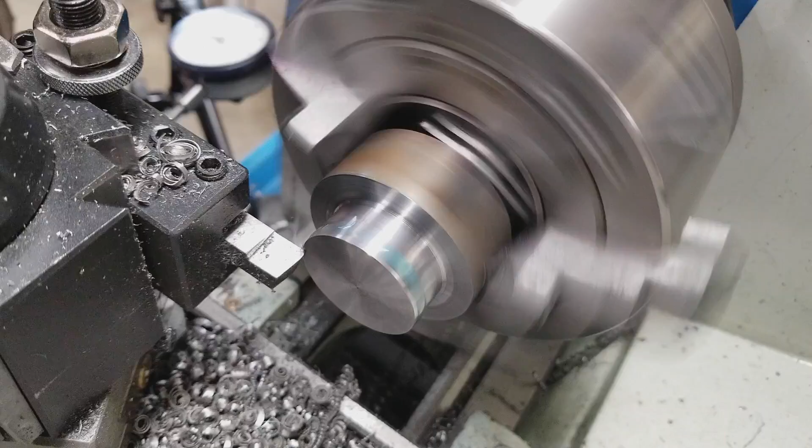Why is that wanting to chatter? Got like no stick out here. It's not a heavy cut. What the heck is going on?

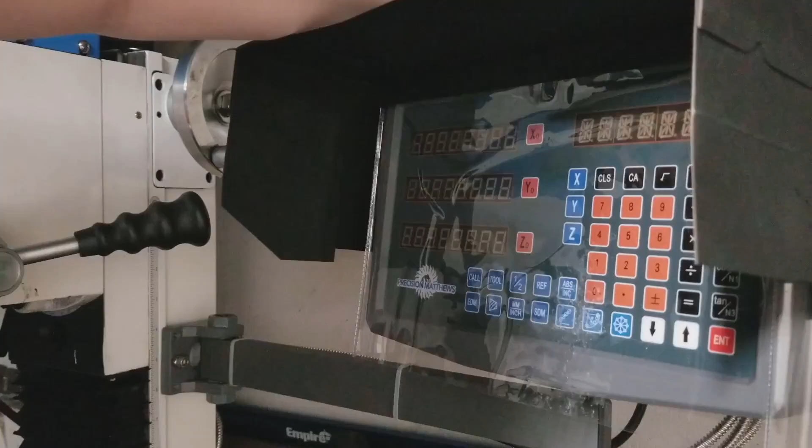We're back on the PM1 steam engine today and we need to do an operation that you don't see very often. It's called spot facing. There's a lot of different ways to do it. We're going to pick the best one for us right now.

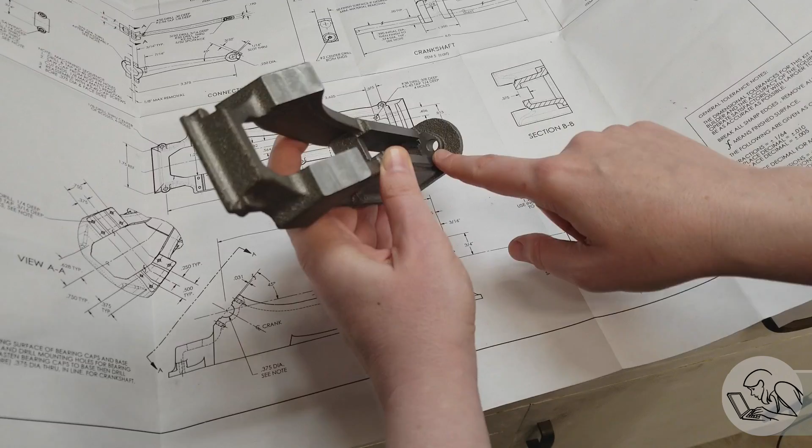Strategy time again. So we've got the hole made for the piston rod and next we need to machine this end here. And the drawing calls for that to be round so it'll mate with the cylinder. And that's what it's supposed to look like right there. This is a spot facing operation, which is a fancy name for a very shallow counterbore.

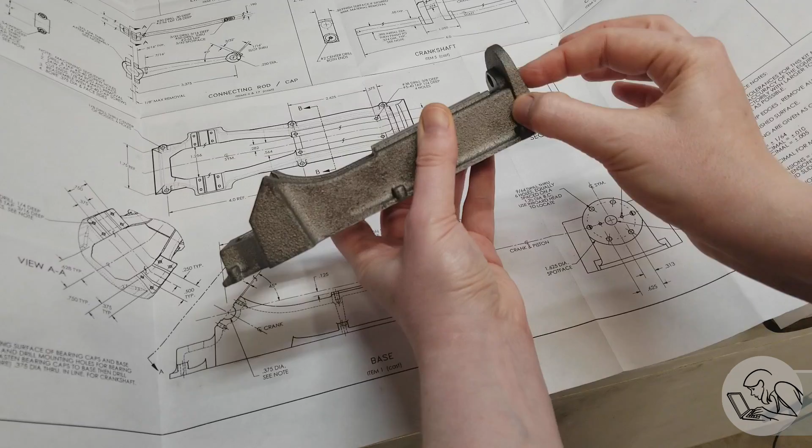So we've got a slightly tapered surface here. It's tapered, of course, because of the draft of the casting. And so we need to make it flat and it needs to have a round bottom. The diameter of this is 1 5/8, 1.625 inches, which is not a super convenient diameter. That doesn't match like an end mill or something that I have.

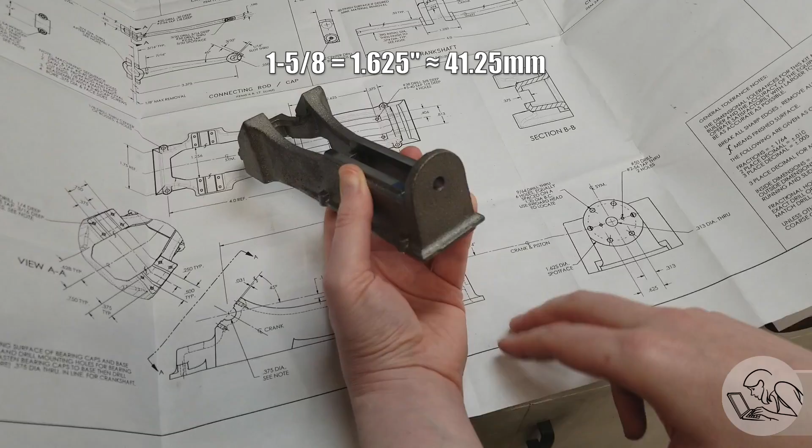And we could just machine this flat and it would be fine, but I want to make it nice. I want to make it round like it's supposed to be. So I have a couple of ideas for that. First idea I had was to do it as a genuine spot facing operation. So I would fixture the casting on the cross slide, something like that.

And then I would make a tool that would look a lot like a line boring tool. It would be a shaft that would go in the chuck and in the tailstock, and it would have a small piece of tool bit like this, and it would spin like so. And the idea is you make a shaft that fits through the hole there, and then it has a particular grind on the tool bit, look a little bit like a lawnmower blade,

and you spin this guy and you face off the surface. So you make this tool bit grind such that it grinds a surface of the exact diameter that you want in one pass. That's how real spot-facing machines work.

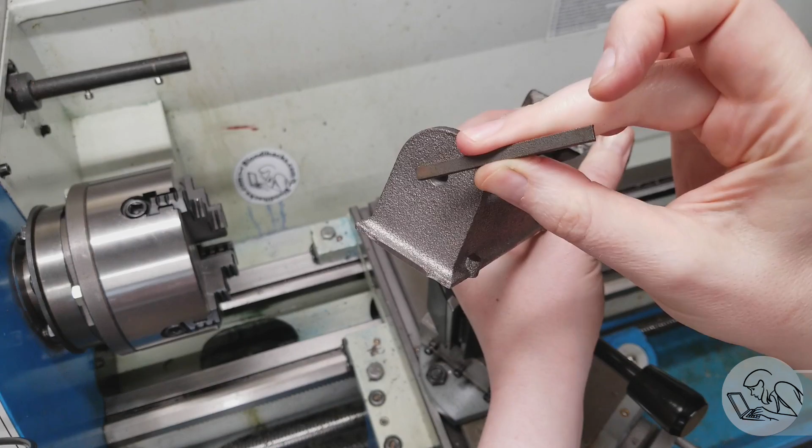Here's the problem with that plan. This hole here is not very big, and the tool bit I would have to make is also not very big, and the distance that the line boring rod would have to go through is quite long. So the rigidity of this whole setup would be pretty poor. And I really rather doubt I'm going to be able to do a 1.625 spot face with such a small shaft over such a long distance.

It's really tempting to try that because it would be a cool operation on the lathe, but I really don't think it's going to work. I spent a long time thinking about this, trying to come up with some way to make it work. Like, was there a way I could do it in multiple passes, extending the tool bit a little bit each time, or design some kind of a spot-facing tool that had an adjustable depth of cut? I really wanted to make this work because it would have been a really cool operation. But I had to give in, and I'm going to do it a simpler and more practical way.

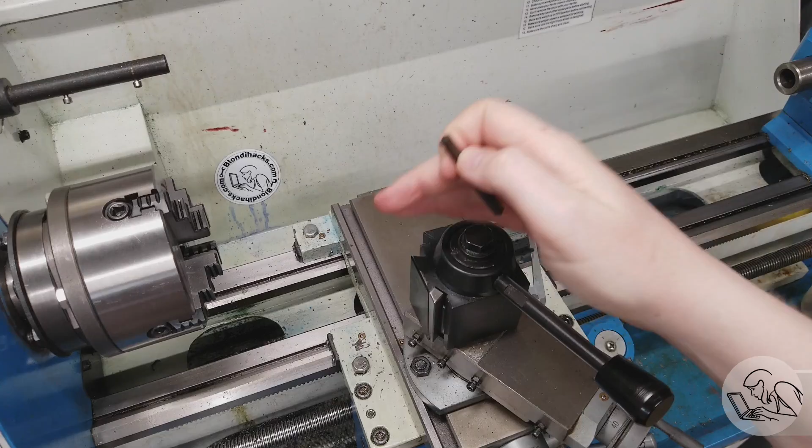Instead, what I'm going to do is I'm going to stand it up in the mill, like so, and I've got a piece of steel here, and I got my tool bit, and I'm going to make a one-time use fly cutter, and it's going to be exactly the diameter that I need. So I'm going to make a little miniature fly cutter that has the tool bit at exactly the 1.625 diameter that I need,

and then I'm going to take advantage of the fact that the spot face has an open end on it. It's not completely embedded in some other surface. So what that means is I can take my fly cutter and I can come in from the side like this, and I can just come in to the same mark on the DRO each time, doing multiple passes, working my way down, and my stopping point is centered on my hole right there. And if I locate that hole really well and I'm careful with the DRO on each pass, then I'll end up with a perfectly centered spot face of the correct diameter.

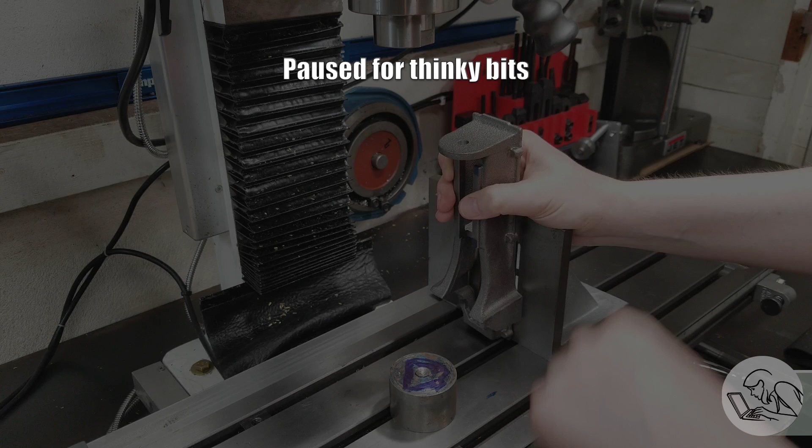Now you could also do this with a boring head. Boring heads can be used as a variable diameter fly cutter with the right tool grind. However, boring heads take up a lot of vertical space, and this is a very small hobby mill. So with the tall casting in there, I really only have a couple of inches within which to create some sort of tool that can do this job. So that's why I'm going with the little tiny fly cutter.

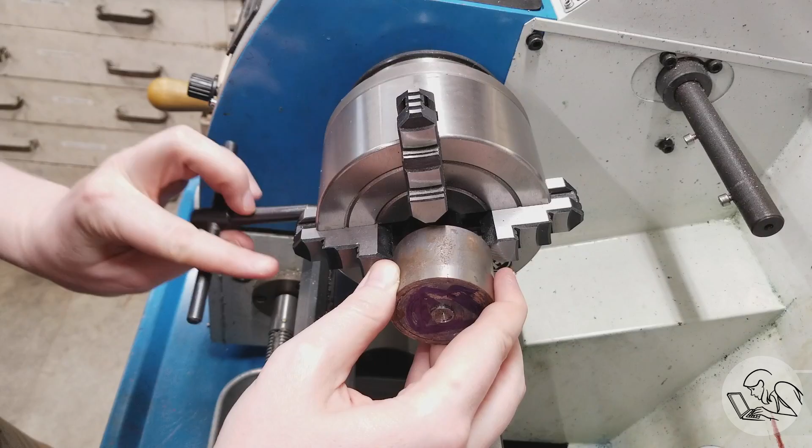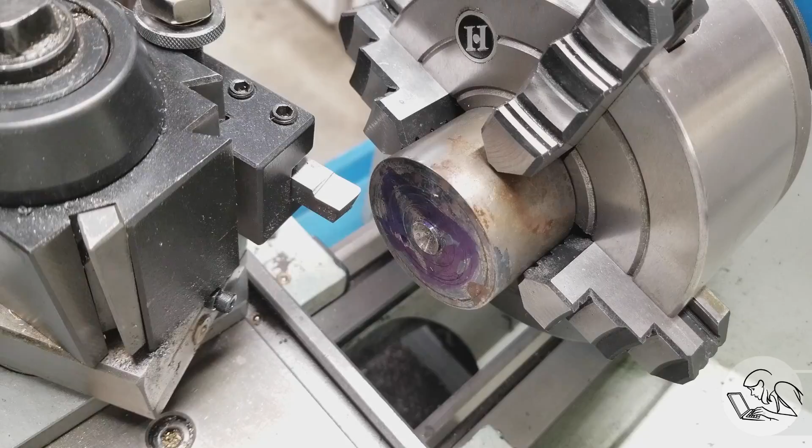I'll start by chucking up this piece of scrap in the 4-jaw, and I'm doing it in the 4-jaw because there will be 2 separate setups required here, and well, also just because the 4-jaw happened to be on the lathe and I don't want to swap the chucks twice, even though these first few steps would be a lot easier on the 3-jaw. But I will start by facing the end, as is tradition.

Times like this, I'm glad I sprung for the power cross feed. Look, Mom, no hands. This last part should be especially satisfying as I face off that old drill cone from some previous part that was made from this stock.

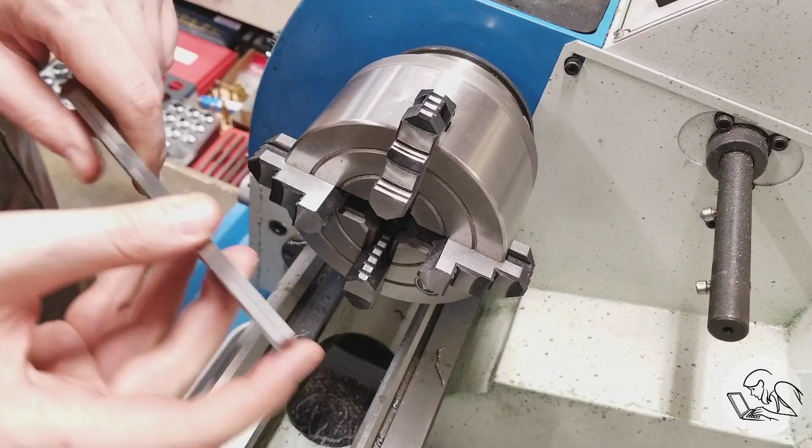Now I'm going to flip the part around, and I want to make the other side parallel to what we just faced, but I need it to be off the surface of the chuck a little bit. So I've got some parallels in there to give it some space. This would be a great use case for a lathe spider if you've ever seen one of those, but I don't have one. So the parallels work just fine. You can tap them in securely against those, and the part will be parallel to the chuck face. Just of course don't leave the parallels in there, that would be very bad.

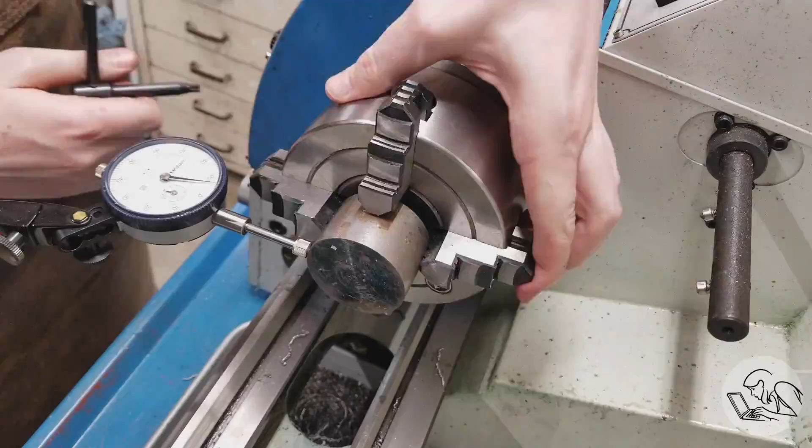The reason I need it off of the chuck face a little bit is because I don't have enough length of material there to create the features that I need if the part is seated fully against the chuck face. There's a little bit of an art to this tapping in method, because if you tap it in too firmly, the parallels get jammed in there and you can't get them out. So you kind of have to tap it in so that it's about the same friction as a feeler gauge, so you can still remove it, but you can trust that it's fairly parallel. This isn't going to be 100% perfect, but it's certainly good enough for what we're doing here. So now I can face off the other side, and those two sides will be parallel.

Now I'm going to square up the tool post here, and I'm going to make the mandrel of the fly cutter. I touched off with a witness mark there on the depth that I want, which isn't critical as long as I have a good chunk there that the collet can grab. You can see there why I really needed those parallels in there to space it off the chuck, because I really don't have enough room on this piece of scrap to get all the way in there.

Now this is cutting very well, but you can hear there's a kind of a noise in the cut that's right on the edge of chatter, like it lives next door to chatter, and you know, they've talked over the fence a little bit, and maybe it's kind of interested in chatter and it's thinking about buying chatter dinner, but it doesn't know how chatter would feel about that, but it's not quite there. And this took me a little while to figure out what was going on. I messed with my setup a little bit and I fooled around with it, but it was doing the job, so I just kind of kept rolling with it.

Here on the finishing pass though, you can see what's wrong and where the chatter is coming from. The grind on this tool isn't quite right. You can see that when I put the nose radius on it, I messed up the front clearance a little bit. So when the tool is squared to the work like this, you can see that it's actually cutting a little behind the nose radius on the flat section there. So I basically accidentally created a shear tool. So it's getting a great surface finish, but it can't handle very much depth of cut at all, or it wants to chatter.

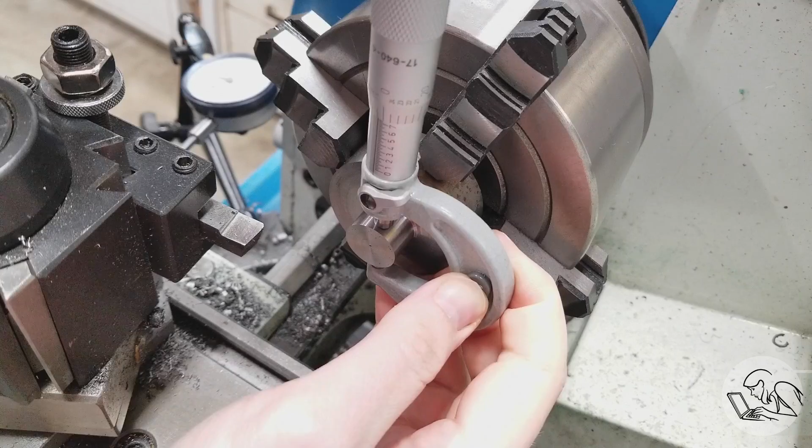Okay, let's see how I did. I'm aiming for 750, so it'll go in a 3/4 collet. And I'm about a thou over, but it'll still fit in the collet, so that is okay. So I will chamfer that edge and just make sure that it's going to go in a collet, and indeed it will. I think that's going to work out just fine.

Now I'm going to flip this part around and do the other side of the fly cutter, but once again I can't push it up against the jaws because I need to be able to get right up there with the cutter. But now I can't get parallels back there, so how do I make sure the part's running true with the lathe and the front face of it is square?

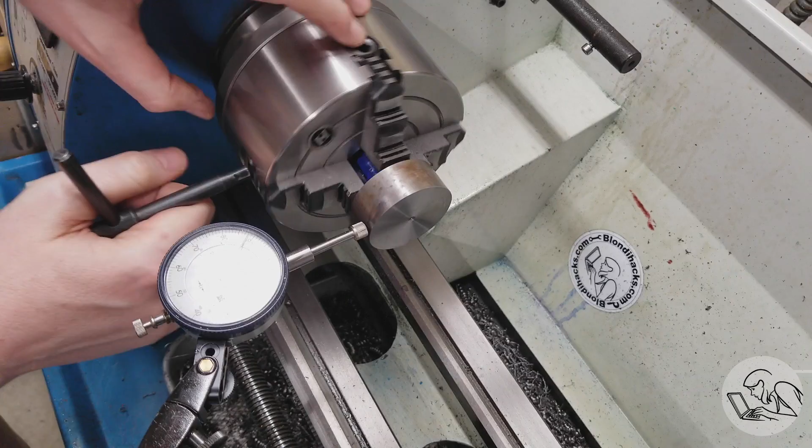I start by dialing it in just like you would with any other part in the four-jaw, and then I move the indicator over to the front face and I dial that guy in as well. So the front face should be reading no runout if it's square to the lathe, and I have a couple of thousandths there, so I just tap it in, and I'm tapping on the sides.

That's a little bit counterintuitive because you would think you would want to hit it on the face because you're trying to square the face, but if you do that, you're just going to push it further into the chuck and it's not going to straighten the part.

Now I can do a couple of passes on the outside diameter just to get that running true. You can see I've switched out the tool there, as I said, and this one is cutting much better. You can see that it's cutting on the nose radius instead of behind it. And then a little chamfer there will finish it up.

Now, did I do this in the minimum possible number of setups on the lathe? Probably not. I swapped it back and forth twice end for end, which was probably a waste of time. I'm sure if I'd planned this a little better, I could have done it more efficiently, but the job got done. Now I'm just going to deburr that backside there with a file because I forgot to do it when I had it in the other setup. You really want to avoid improvising in machining. It really pays to plan ahead a bit.

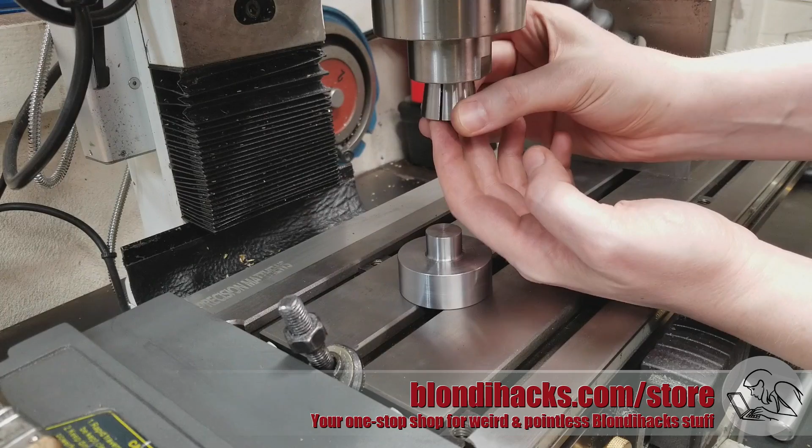Now I need to make a hole for the tool bit a very precise distance from the center in order to make sure that it cuts the radius that I want. So I need to get it perfectly aligned on the mill spindle, which, because it's designed to go in a collet, is actually very easy to do.

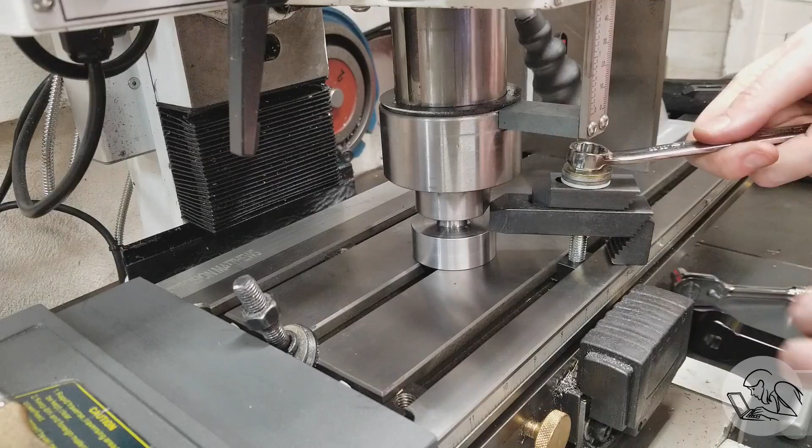I just put the fly cutter body in the collet, pull the quill all the way down till it's on the table, clamp it down, and then zero the DRO right there, and then loosen off the drawbar, which I did by tapping the drawbar wrench to make sure that the drawbar loosened before the part twisted on the bed there. I'm kind of shocking the drawbar loose before it tries to turn the part. And then I pull the quill up, and there's our part, perfectly centered on the spindle.

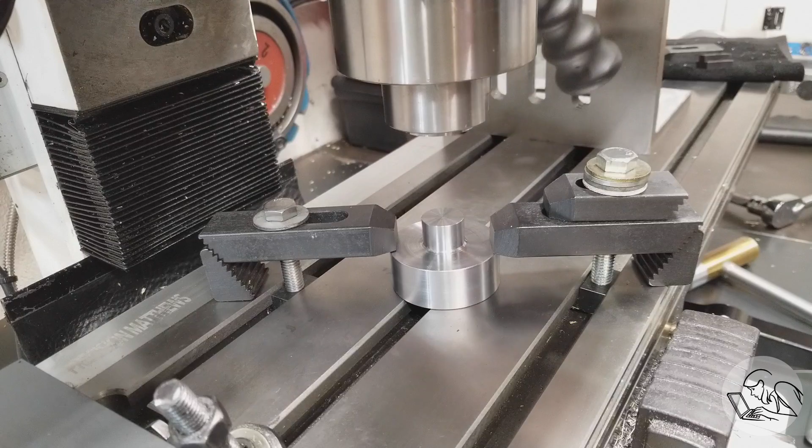Now we need to get with the mathy math because I need to figure out where to put the hole for that tool bit. And the trick is that the outer front corner of the square tool bit has to be on exactly a 1.625 diameter so that it will cut our feature properly.

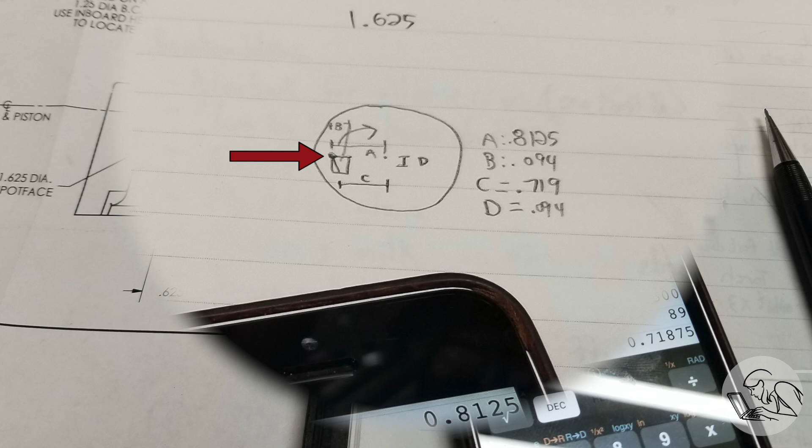That means that the hole that I'm going to drill with a round drill bit, mind you, inside that square has to be at a specific radius, but also a little bit below center line because the front edge of the square tool bit has to be on center. So here's the math that I did to work that out. And luckily, because we're centered on the spindle, the DRO is going to get us to that spot quite easily.

Next, I want to double check that my drill is going to go into the T-slot of the mill table here and not hit the mill table as I hoped it would, and indeed it does. I got a little lucky there on that positioning and didn't have to redo that. I start by center drilling that, and I'm drilling to a little less than the size of a circle that would fit inside that square for the tool bit that we need.

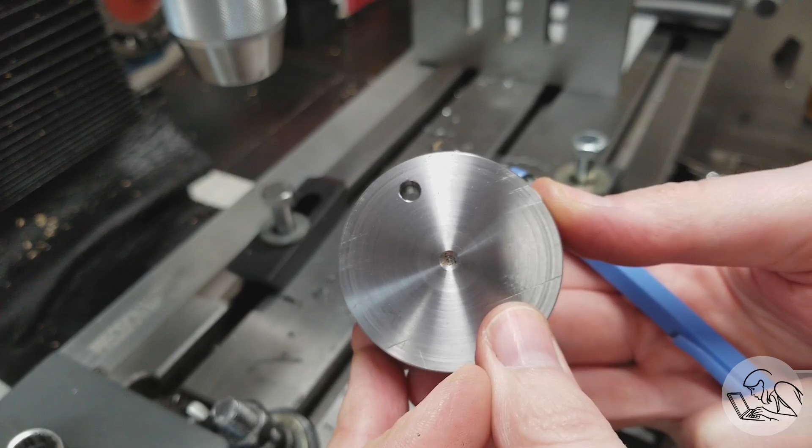That's really it for the machine tool work on this thing, believe it or not. So I'm just going to deburr that hole. Okay, that's looking very nice indeed. I think we're done. We'll do a little test fit with the tool bit here, and oh, right, something square peg round hole. Okay, we need to make this into a square hole.

The perfect tool for this job would be a square broach that I could use in my arbor press. Unfortunately, broaches are very expensive and I don't have any. So I'm going to do it old school. Here's a file, and this file is smaller than the square hole I need to make. So here we go. I'm just going to file that round hole square. And yes, this takes a while, and yes, your hands are going to be a little sore by the end of it, but it's character building.

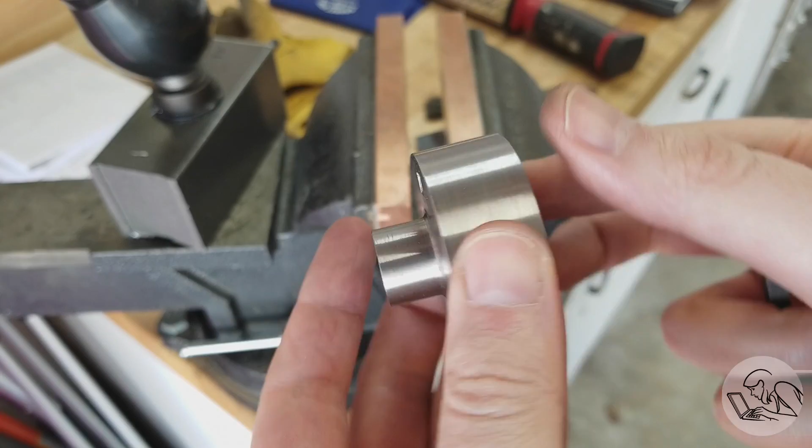The key here is to check your work often as you file to make sure you're not getting crooked and that you're not introducing taper. And that's really easy to do when filing because the file can easily bend or shift off of flat as you go. But after about an hour of character building, we have a pretty decent looking square hole that I believe my tool bit should fit into. And look at that. Very nice. I think that might just work.

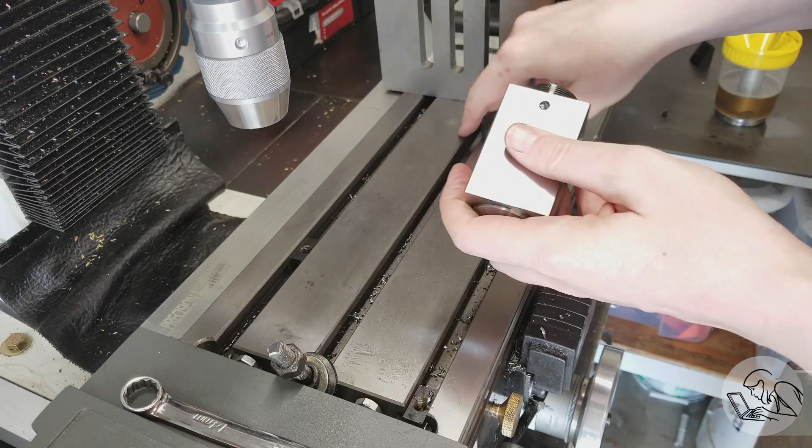Okay, I lied when I said we were done with the machine tools because now we need to put a set screw in there to hold that tool bit in place. So I'm going to mount the body of the fly cutter in a 5C collet block here, and I'll put that on a 1-2-3 block to get it up off the table since the vise is over on the bench because it was in the way of our steam engine project. And I'm just squaring this up by eye and by feel. It really isn't that important.

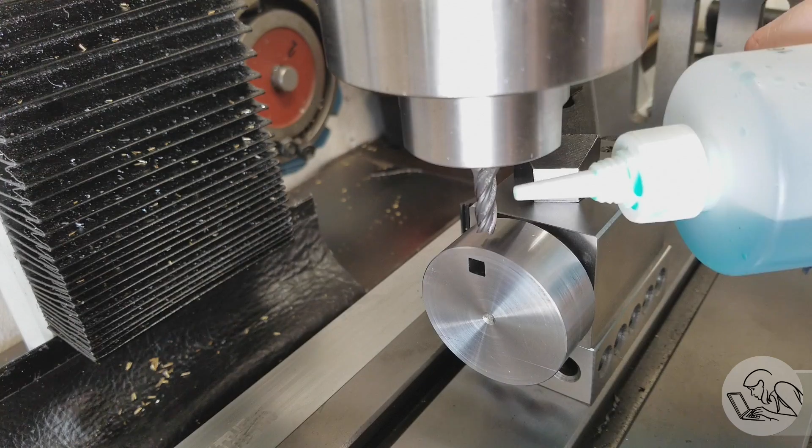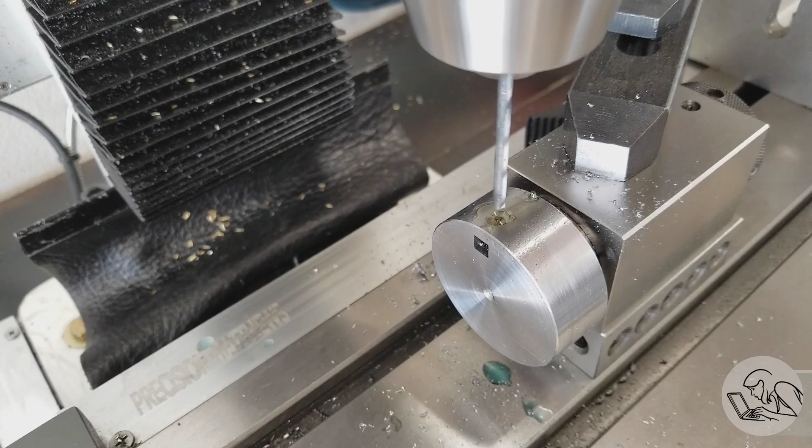And I'm going to put a flat spot on here with an end mill because normally when you drill into the top of a convex surface, you can just center drill carefully and that will put a dimple in there that'll keep the drill bit from wandering off the curved surface. However, when you're drilling offset on a curved surface like this, not on the dead center of it, even a center drill is going to want to wander off that surface. So make a little flat spot with an end mill first, and then center drill on the flat spot, and then come in with the tapping size.

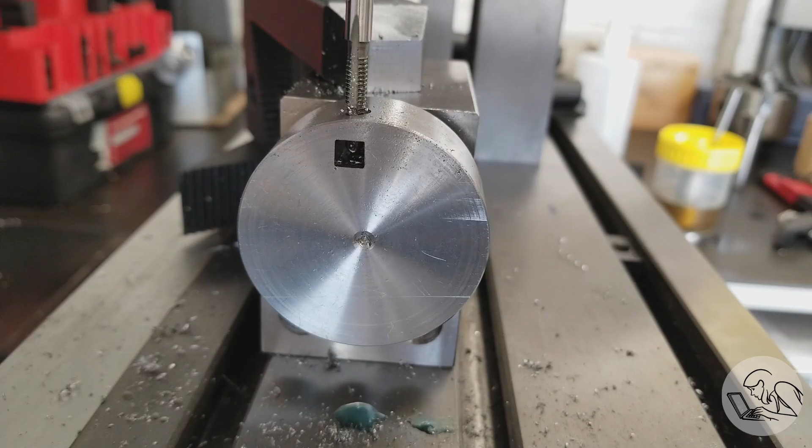Then I can come in with my spring-loaded tap follower and set up to tap that hole. This is, I think it's 8-32. I don't know, it's whatever set screw I found in the bin. And I just eyeballed the location of this threaded hole to make it roughly centered on the square hole there. As long as it's in the square hole and touching the tool bit, it's going to work. So we'll do a little test fit here now.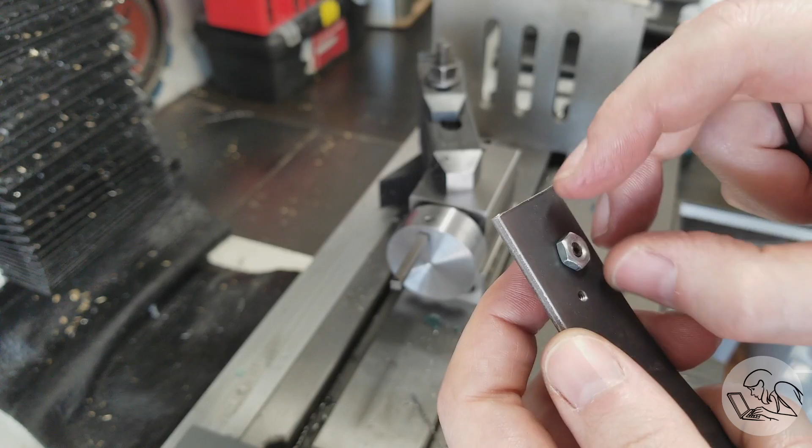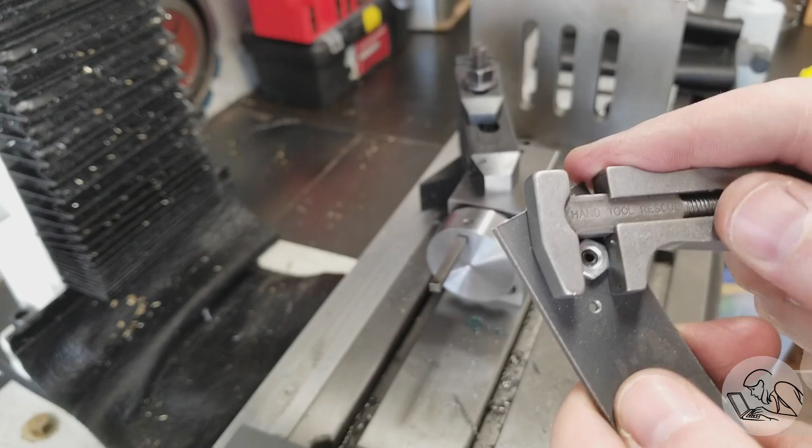Tool bit goes in. Set screw goes in, and it's going to work, except my set screw is too long and it has a dog point on it, and both of those things mean there isn't a lot of thread engagement. So I thread it into a piece of scrap, put a jam nut on the back, and grind it flat on the grinder. And now I have an itty-bitty set screw. Now undo my jam nut there, and thread that guy in there. And that looks like it might work. So you can see how it's going to spin around and be a fly cutter.

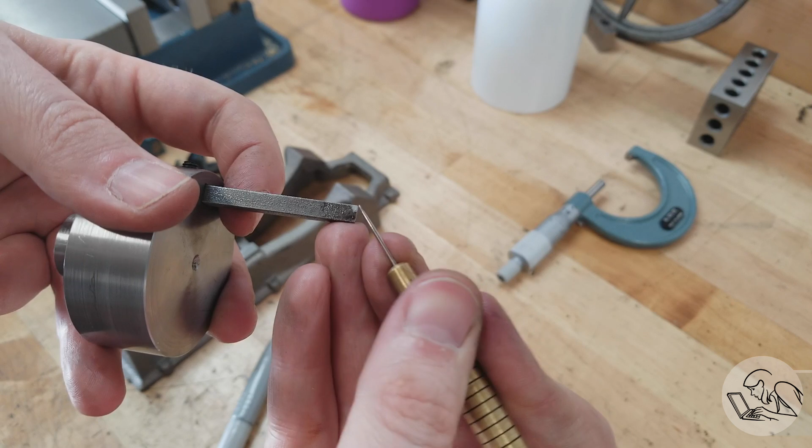Now it's time to grind that tool bit. Obviously it's a lot too long and it has no grind on it. This is a raw piece of high-speed steel that actually a viewer donated to the channel. So I mark the cutting point so that I don't lose track of it, and I just need to grind clearances falling away from that cutting point in every dimension.

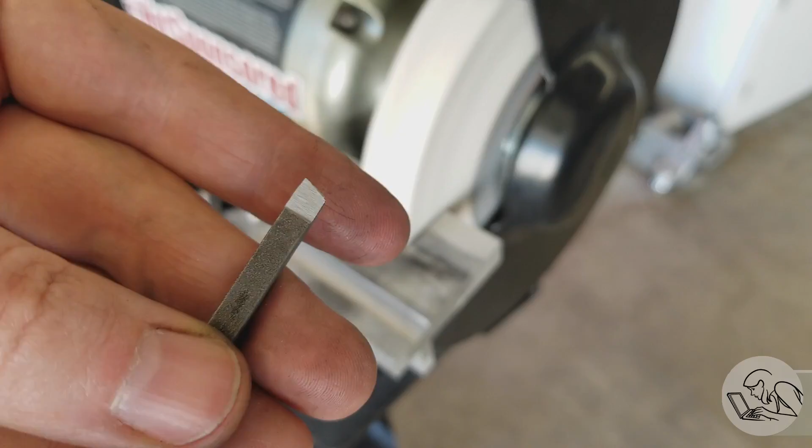What's interesting is that this ends up being standard right-hand turning tool geometry because the tool bit is vertical. Normally with fly cutters, the tool bit is lying sideways, and so you end up requiring left-hand turning tool geometry, which is sort of annoying because it means you can't reuse your tool bits between your lathe and your fly cutters. But in this case, we can. It's a very tiny tool bit, which made grinding a bit of a challenge, but it looks like that is going to work out.

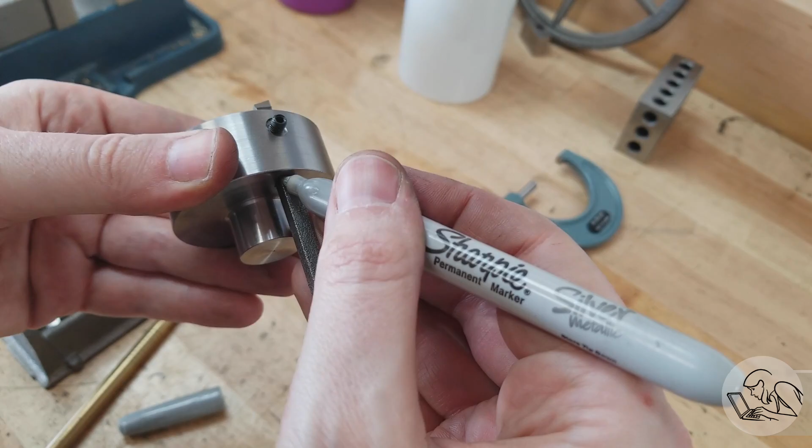And I'm just going to mark the length now and cut it to length with a grinding disc on the Dremel.

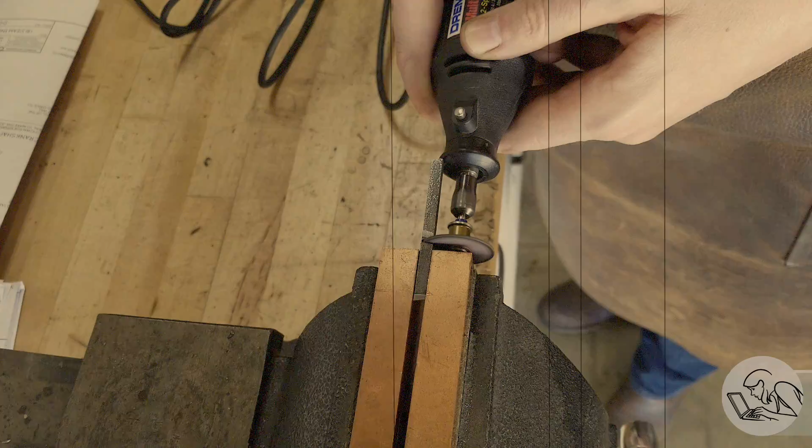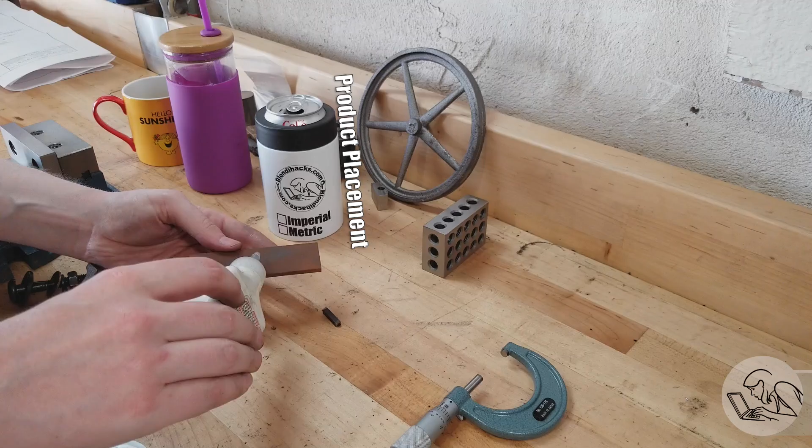Here's a pro tip when using a Dremel like this. Make sure to finish the cut such that the extra piece that is being cut off lands perfectly on the bench. Now this takes practice, but if you're really skilled with this tool, you can get it to do that every time. What? Why is everybody laughing? What? I could make it do that again. And I don't need to show you, I don't have anything to prove. Get out of here, this is my shop. Now, where was I?

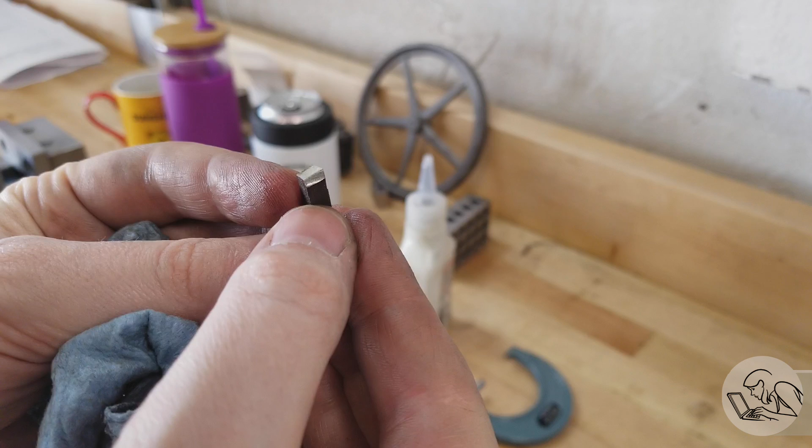Oh yes, this tool bit. So next I gave it a little hone on the stone and sharpened it up. It's looking pretty decent. You'll see that I didn't grind the side clearance there all the way down, mostly because I was lazy, but that's okay. This cut is not very deep, so that will suffice. Back into the fly cutter it goes, and the fly cutter goes into the mill, and let's see about giving this thing a little test drive.

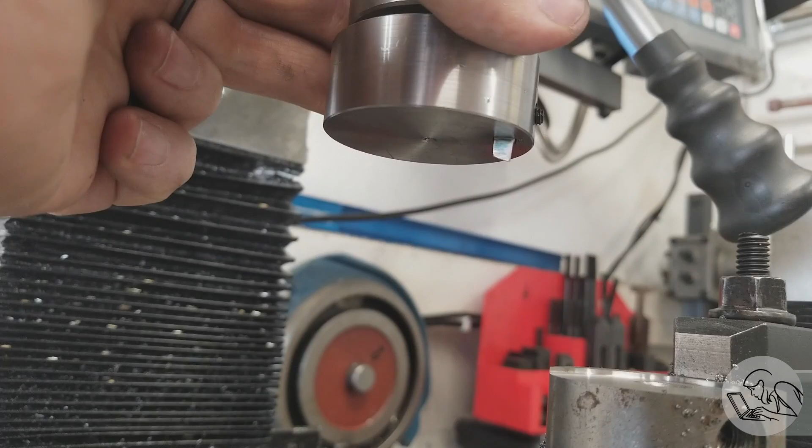So I think that's gonna work. You can see how the outside point there is gonna be doing the cutting. So here's a piece of scrap, and I'm gonna do some test cuts here. The piece of scrap has kind of a boss there that's proud of the top surface, which will work out good because it'll give me a chance to test it out.

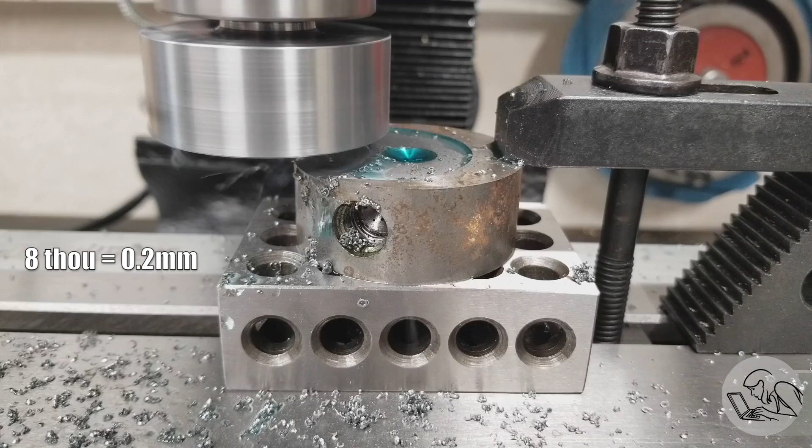So far so good. It's cutting like a fly cutter, which means it threatens to chatter if you get too aggressive with depth of cut, and you need to feed very slowly. I think the most I did was like an 8 thou pass here. It's important that my test cut is deep enough that I have enough meat to measure the straight sides of the cut and not catch the fillet made by the nose radius of the tool. And this is cold rolled mild steel that I'm cutting with it.

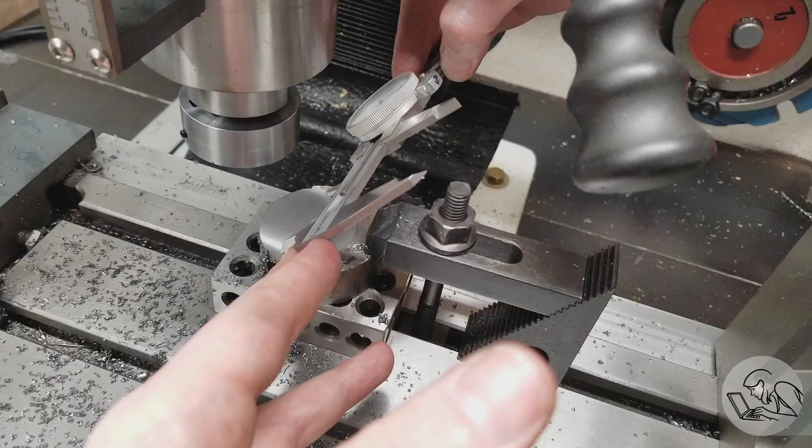Surface finish there is pretty decent. I think it could be a little better. I'll experiment with that. I made one more pass with a little bit more speed and just a 2 thou depth of cut, and now the surface finish is excellent. But let's see how we did dimensionally. I'm measuring at the widest part there where the cut is straight and trying to get a sense of it. And you can see that we are at 1.646.

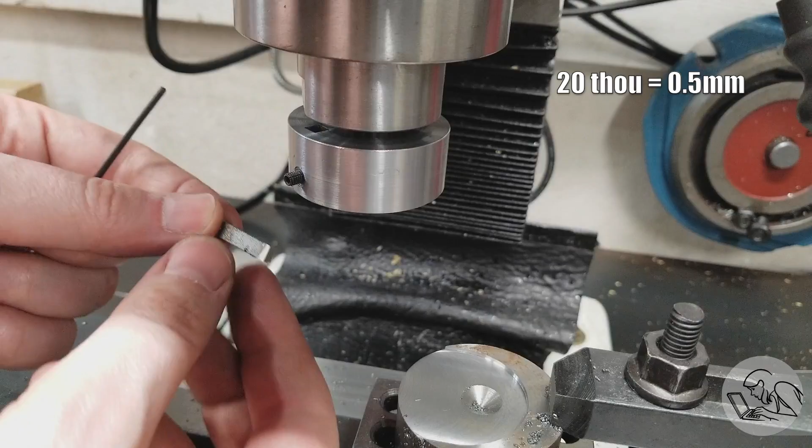So we're actually 20 thou over on the cut, so probably my filing was a little bit imprecise, but that's actually good news for us because I can make the diameter of the cut smaller just by grinding the outside of that tool bit down a little bit. So I blued it up and marked a 20 thou line on the edge and then ground that side back down to that line. So another test cut.

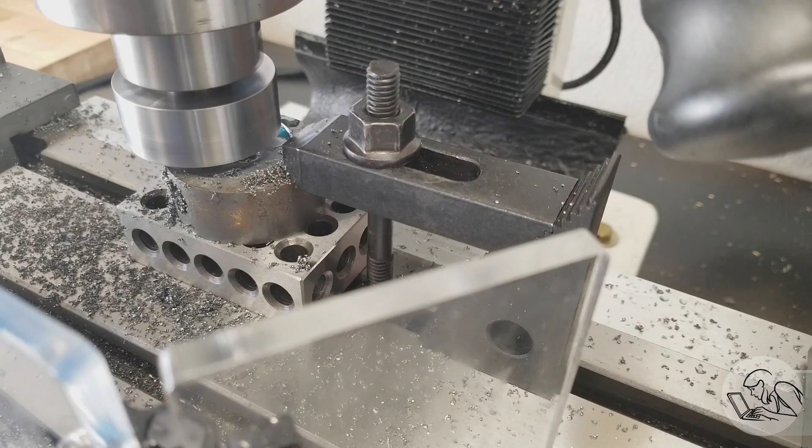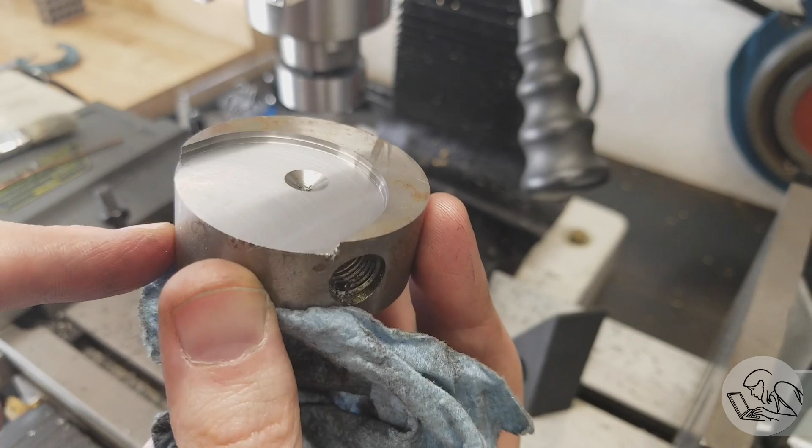And let's see how we did this time. Again, making sure I went deep enough for this measurement. And we are at 1.621. So we're actually 5 thou under now, and I think that's going to be okay. Here you can see the two test cuts, one of them being 20 thou smaller than the first one. That worked really well.

Now, if I wanted to chase that last 5 thousandths, there's a couple of things I could do. I could, of course, regrind the tool and make a new cutting edge on it that was 5 thou wider. A better way, perhaps, would be to grind down two sides of the shank of the tool to make it a little smaller than the square hole. And that would allow me to shim it with some 1 thou shims, 2 thou shims on either side and move the tool radially and change the diameter of the cut.

But I'm not going to do any of that. I actually like that it's cutting a little undersized right now because this is the shape of the cut that we're going for on the final casting. It's coming in from one side and leaving a curved arc here on one edge.

So what that will allow me to do is if I need to make it a little bit larger, if that 5 thou is a problem, then I can just move my cutter up and down 2.5 thou and widen this cut out a little bit. And I'll just end up with a slightly oblong curve out here that honestly you probably won't even notice, and it's going to be behind the cylinder anyway. So I'm really happy with how this tool worked. Let's try it on the real thing.

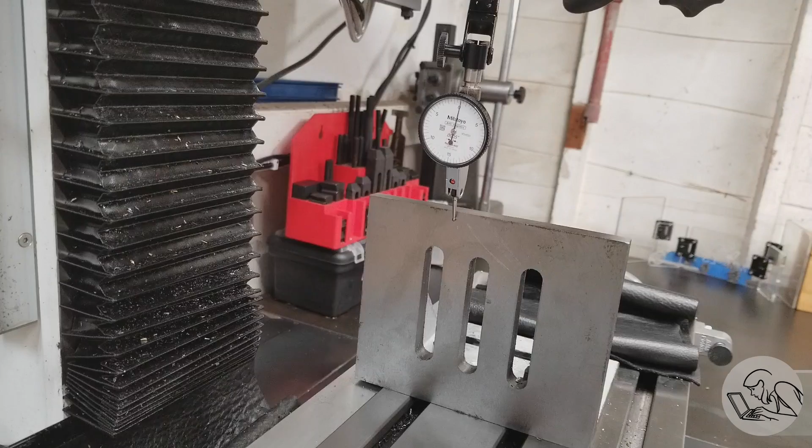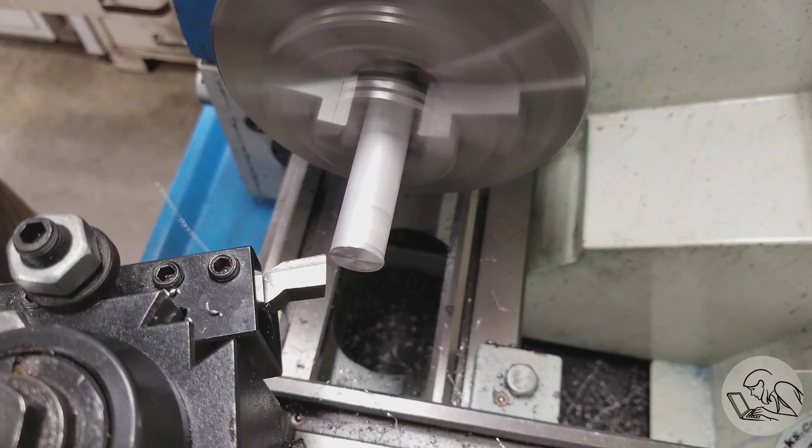A quick double check on my angle plate to make sure that it's still trammed in, and it looks very good. So now I can get my casting fixtured to it here. But a quick side quest back to the lathe for a second. I'll explain why here in a moment, but I've got some aluminum here that I'm going to turn down. I'm using this tool that has a chip breaker grind on it. I've had it in my drawer for a while, but haven't tried it yet. I thought I'd give it a shot on aluminum to see if it breaks a chip better than my other tools do.

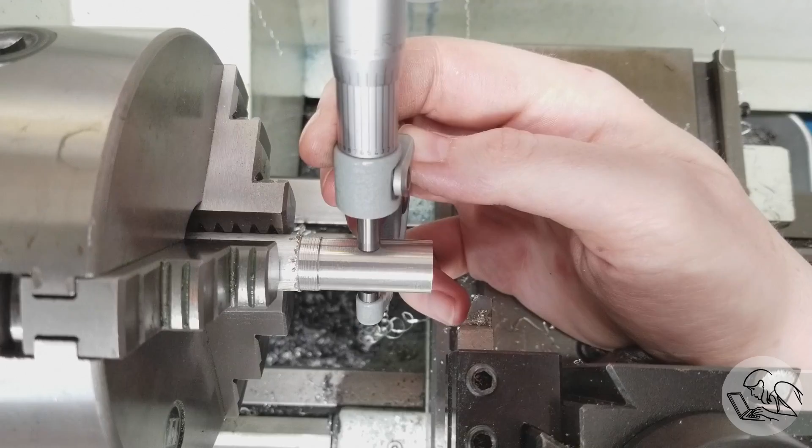And it does break a chip okay, but the surface finish on it is pretty dreadful. So I'm not sure if I like this tool very much. And in fact, as we get further down, it stopped breaking a chip anyway. Yeah, that's totally rubbish. Okay, back to my traditional aluminum tool, and this is turning very nicely. That is a beautiful finish, and it breaks a chip, frankly, no worse than that chip breaker grind did. So I still haven't found the magic bullet for breaking chips on aluminum, but that's okay. We're getting the job done one way or another.

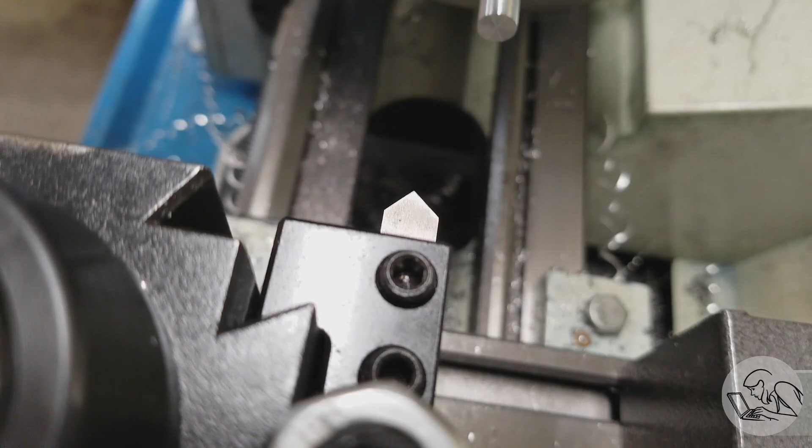I'm turning the OD to 3/4 because that's going to go in a collet in the mill, and then I turn a narrower section at the end to go into the hole in the end of our casting. And I'll do a chamfer on here because we're going to do a test fit, and any burr would mess up that test fit. And the first test fit was a failure, so I'll take just a hair more off and try it again. I don't know exactly what the size of the hole in the casting is because it was made with a drill through a bushing, so I just took off like a half a thou at a time until it fit, and that is a perfect fit.

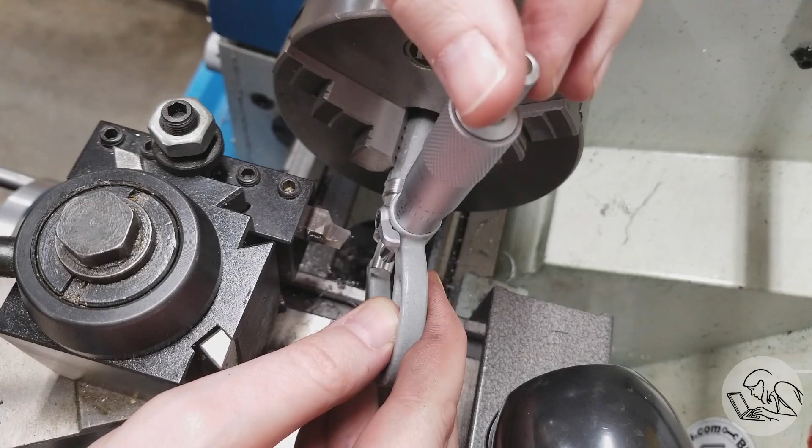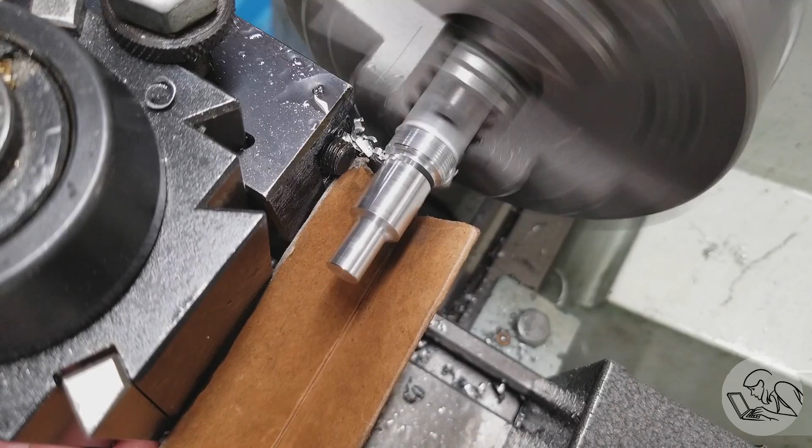Out of curiosity, let's see where we did land. That's 313.5, and that was drilled with a 5/16 drill, so it's about a thou oversized, which is about what you expect with a drill. Now we're all set with this little mandrel tool thing, so we can part it off. Yahtzee. Side quest complete. We can resume our setup of the casting.

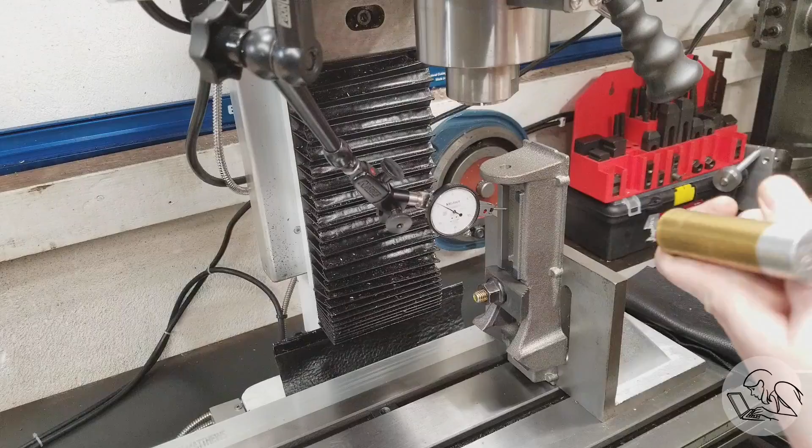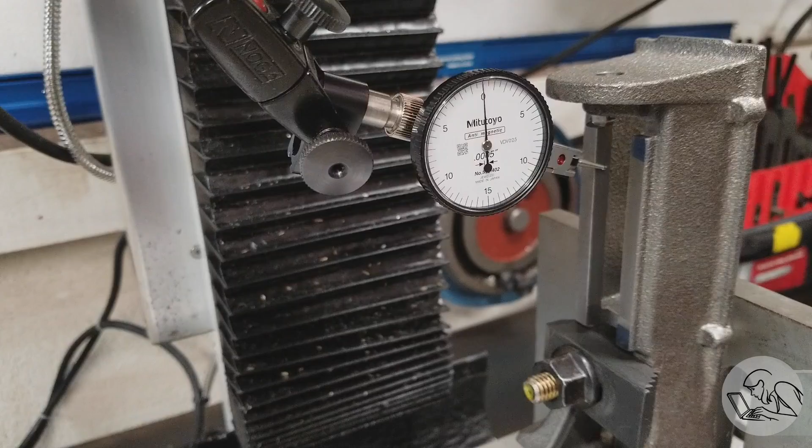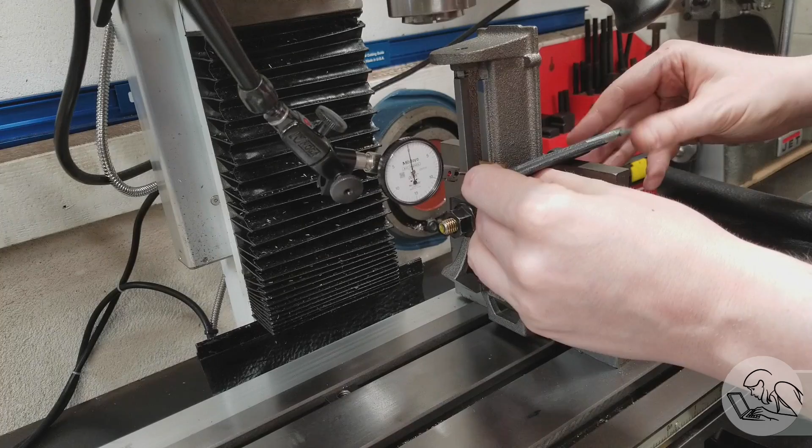And this needs to be really, really vertical because that's going to dictate how square the cylinder is mounted to the engine relative to the piston axis and the crankshaft and so on. So it's very important that we get this as perfectly set up as we can. So I'm indicating down the length of the entire inside edge of the bearing slides there, and that's pretty much dead nuts on 0. We've got maybe a tenth somewhere in there, but that is about as good as I can get it. It took a while to get it set up that well, but it's going to be worth the effort. So now I can clamp it in with some brass shims to protect the surfaces.

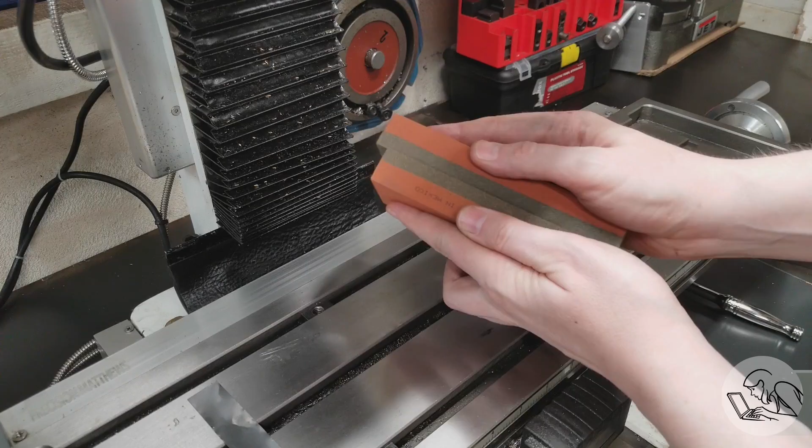And just for giggles, I did one last check on the front of the bearing slides, and it's about half a thou off. So I got worried, took the clamp off and measured the entire length, and yeah, it's a thousandth off of vertical in that dimension. So how did that happen? So out of curiosity, I indicated this angle plate. And would you look at that? This angle plate is a thousandth off of square. So that's not great. I want to do better than that. So I tore it all down and set about fixing this angle plate situation. Step 1 is to go over my table with this precision ground flatstone. This is from Lance Balsey over at 26 Acre Maker.

He makes these guys, and this will remove any nicks or dings in your table and, well, turns your table into an air hockey table, as you can see here. I'm having a little fun. These stones really are quite amazing. They basically make any surface into an air bearing.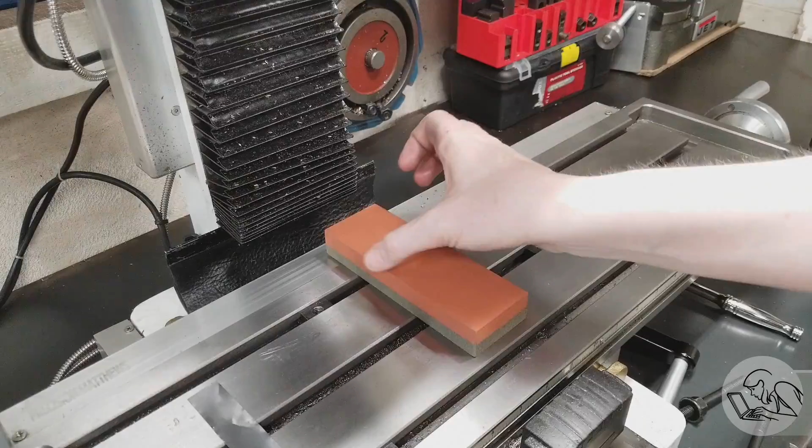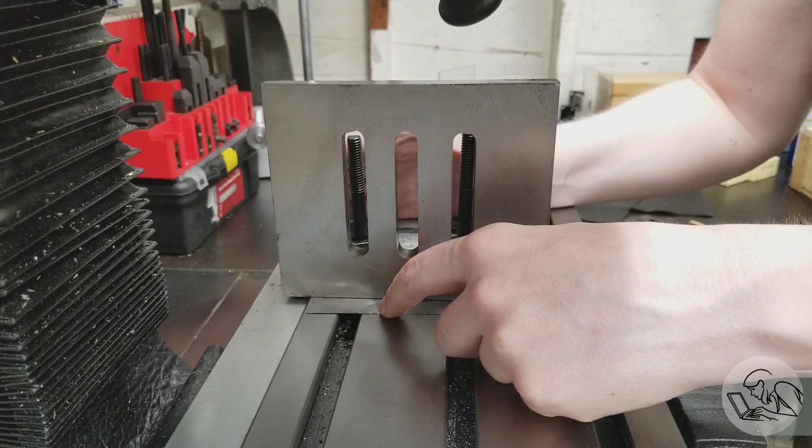I stoned the angle plate as well, made sure everything is clean, and then I set it back up again and indicated it again, and the error is still there. So nothing left to do but to shim it. So I got a 1 thou shim, and we'll see how that affects the angle here. It's not going to be 1-to-1 necessarily. That 1 thou shim is exactly what it needed. That is dead nuts. That's beautiful.

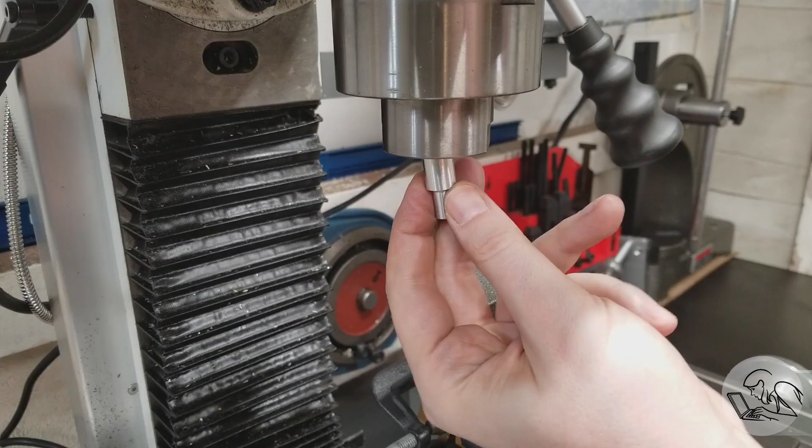Imperial thumbs up. So I redid my setup with the casting, and then I measured the bearing again to make sure that was the only source of error I had, and it looks like it was. Imperial thumbs up once again. Okay, in goes the little mandrel that we made, and now I can use this to line up the spindle on that hole. So this is really just trial and error, just applying very light pressure with the spindle and wiggling the table around until it slides in perfectly.

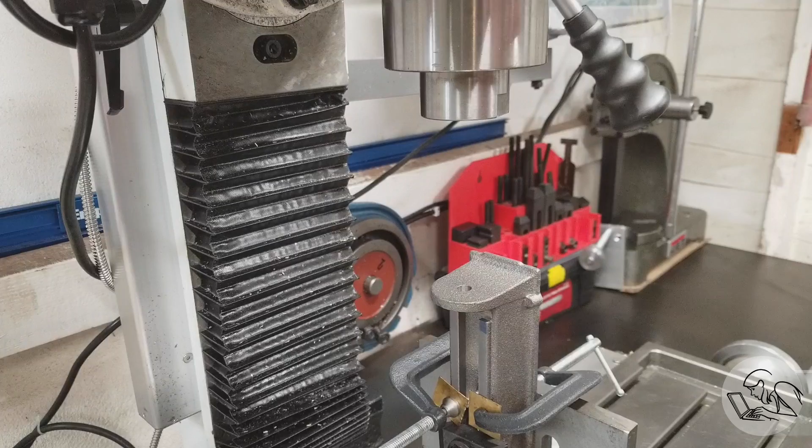Now we can swap out to a 3/4 collet and mount up the little fly cutter that we made. So the spindle is perfectly centered on that hole, and that's the stopping point of the cut, since we want the final diameter that we cut to be centered on the hole. So I then move it off of the casting, I dial in a little bit of depth of cut, and I move it back into the casting, stopping at 0 on the DRO.

This takes a while because at first few cuts nothing really seems to happen because we're cutting into the angle there of the draft from the casting. So there's quite a bit of angle. It's really only the last couple of cuts that are doing a full depth all the way down. But you can see here this seems to be working pretty well. I'm cutting dry here. You always cut cast iron dry because it is self-lubricating. It basically spits out graphite as you cut it. There's so much loose carbon in it.

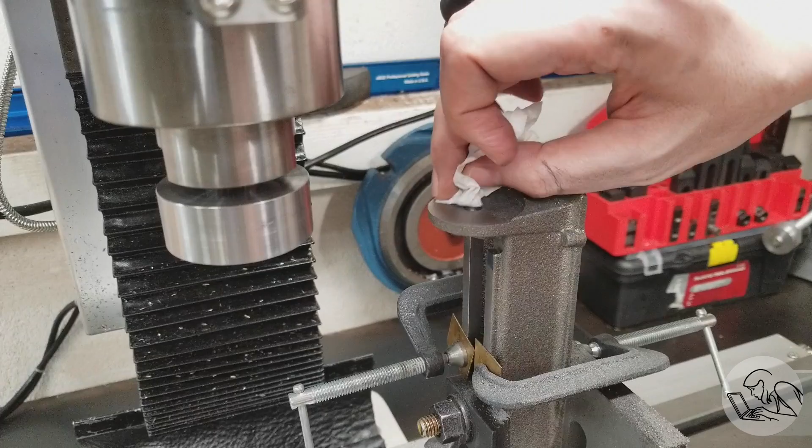Now there's 2 important dimensions here. The thickness from the gland plate across to this surface that we just made. And so there we've got quite a bit of ways to go. However, there's also a dimension here that's specified in the drawing, basically the thickness of the casting area at the top. And on that dimension, we're basically right where we need to be. We don't want to go any further there.

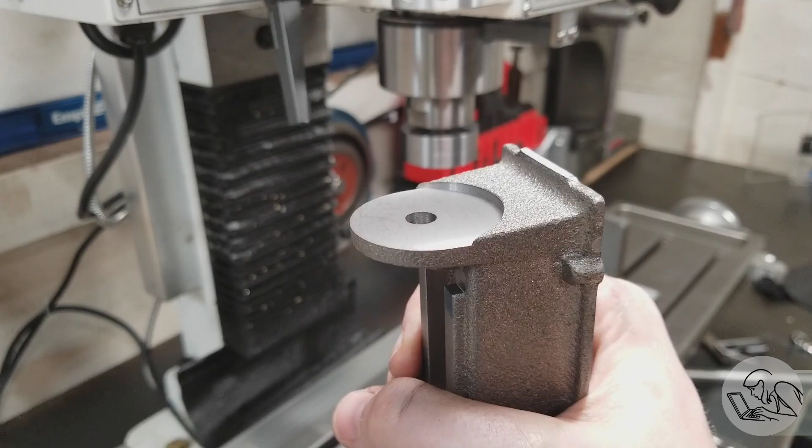So we still have quite a bit of material to remove out of that area between the spot face and the gland surface, but we can't make that spot face any deeper or the casting will get too thin to hold the cylinder mounting bolts. So what that means is we got to set it up back in the horizontal position that we used before to cut the gland plate surface and make the gland plate area thinner.

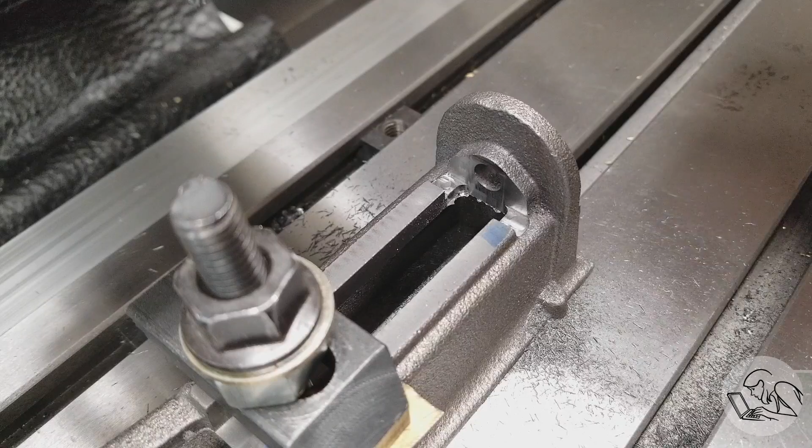So this is a setup that you may recognize from a previous video in this series. So this is the same operation I did there. And I went, in fact, all the way down this time to get rid of those hooks while I was in there. Did a little bit nicer job than before. And then just deburr that and clean it up, and that's looking pretty decent. So the gland nut is going to fit right in there, as you can see. I think that's going to work.

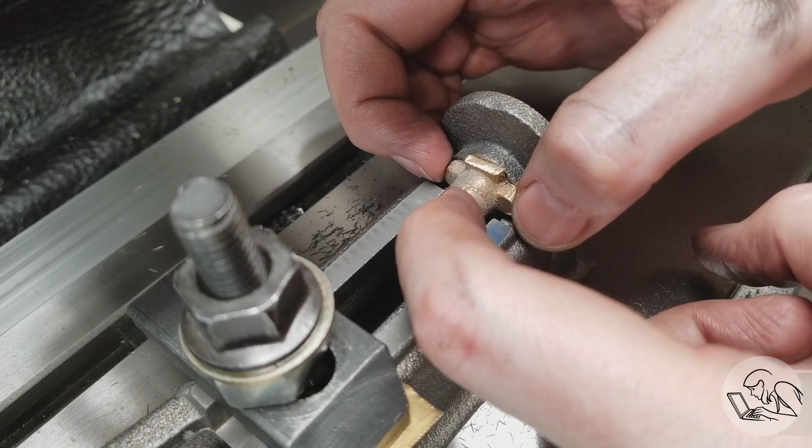Now I'm just going to deburr that hole, again using my Trick Inside deburring tool.

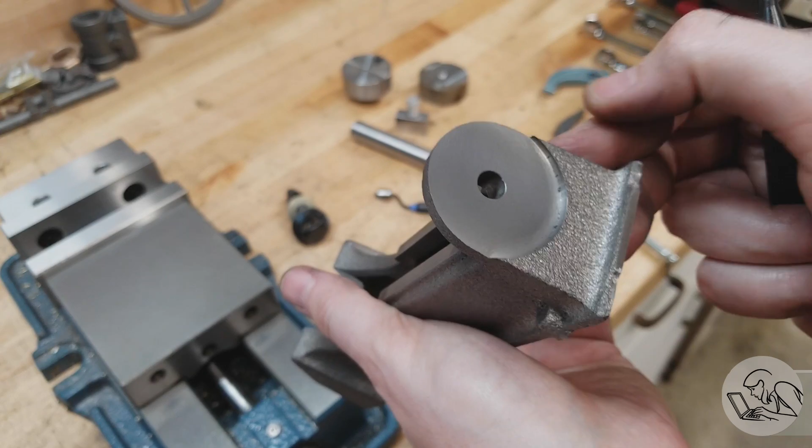Yeah, that's looking really good. The surface finish on there is excellent. Very happy with that. And my dimensions all came out pretty much right on. I think I'm within 1 thou on every dimension that I could find to measure. So far so good. I think this was a successful spot face. This was once again a bunch of yak shaving. I hope it was enjoyable for you.